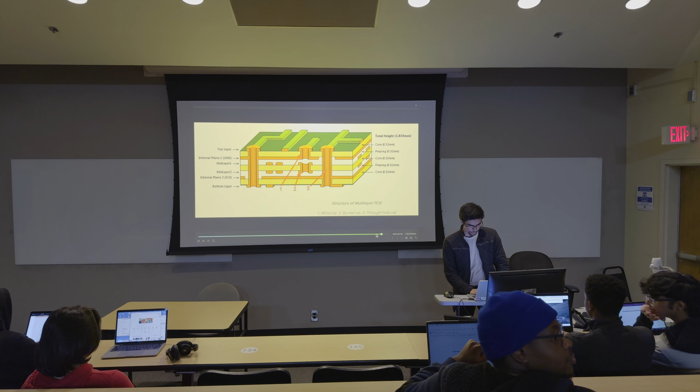So this is gonna be our avionics bay.

Right now, I'll show you my screen in Fusion 360. So this is the current model of our level 1 high power rocket. I can dissect this, do a sectional analysis,

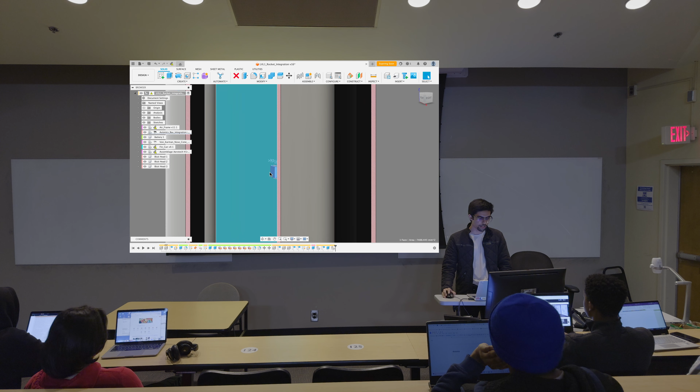to see inside. So right now, as you can see, this is the PCB. There's just one single chip right now. It's an accelerometer. We want so many things to be done by our avionics bay, like our flight computer, but

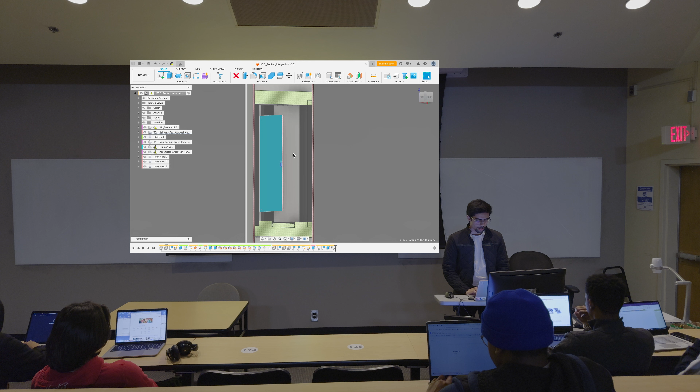just one chip cannot do everything. So we're gonna have chips for each task that we want. We have to think about it, and we have to make a design of this computer.

So let's begin today's meeting. I'm gonna teach you about signals, about how you work on those signals, how you make your own

computer from a bare chip, like an STM32 or an Atmega 328P. So let's begin.

In the winter break, I gave 8 lectures on rocket science and all these things, but there were not as many people as there are now. So I'm gonna walk you through those slides.

So there's something called schematics, or let's just start with the signals first. Okay, I'm gonna turn the lights on.

Does anyone have any idea of what signals are? How would you define a signal?

Like something that's sent out. Maybe I don't know what the thing is, but just something that's sent out. Pulse. Pulse? Pulse is a signal.

Pulse is an example of a signal. But what is a signal? Yeah, that is also an example of a signal.

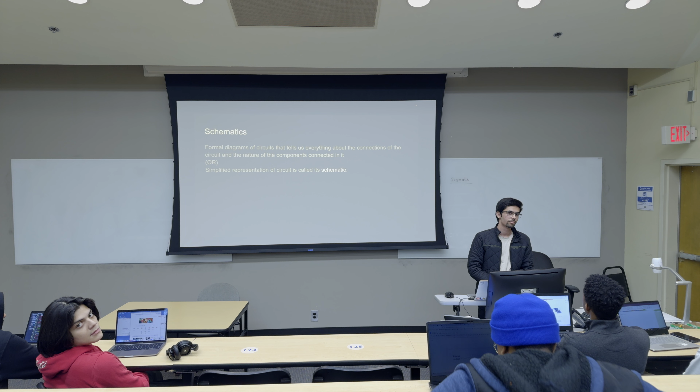I would say it's like a low-level thing, like communication from one part to the other. Whenever I learned about signals, it was in operating systems. It'd usually be about some hardware stuff. I don't know.

Yeah, you're close. It is actually a low-level thing that is used for communication. So, a signal is something that can transfer data from one place to another. If you wanna transmit your data from position A to position B, then you have to generate

a signal from that A location, such that the signal is gonna travel, and whatever signal you're using, there's something called a carrier that carries your signal. So right now I'm speaking, right?

So how is the information going from me to all of you guys? So when I'm speaking, my vocal cords are vibrating the air molecules.

They are generating pressure waves, high pressure regions and low pressure regions in air that are traveling in the air.

Air is a medium, air is the carrier of this signal, and then that's reaching your ears, and you're listening to it, and your eardrum is again vibrating according to those

pressure waves, and then that's encoded in your brain, and you understand that. So we want something like this for anything or everything that we wanna implement in our flight computer.

Let's say we wanna know our location, the location of our rocket. So we wanna generate such a signal

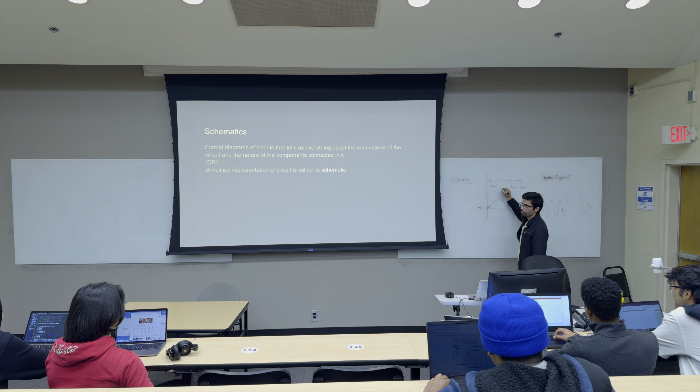So we can encode our information in a signal looking like this, as well as in a signal looking like this. So in computer science, we call this one or true

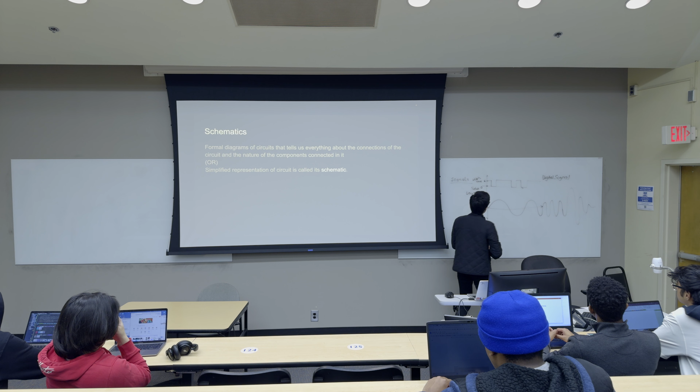or high, and we call this state zero or false or low. This is a digital signal, and this is called an analog signal.

I'll give you an example.

Do you guys know what a resistor is, or what a voltage is? When I say 1 volt, what does that mean? Is there anyone who does not know? Because I can give you a quick walkthrough of electronics.

So there are a couple of devices in electronics. One of the most commonly used devices is a resistor. This is the schematic symbol of the resistor, this is how we represent it on a diagram. And there is something called an inductor, this is how we represent an inductor. And there is something called a capacitor. A capacitor looks like this. They have different functionalities.

So when we generate some current, what is a current? Let's say this is a loop of conducting wire, a loop of copper. So when I say that there is some current inside it, what does that mean? Electrons are flowing, right? So there are charges flowing in this wire.

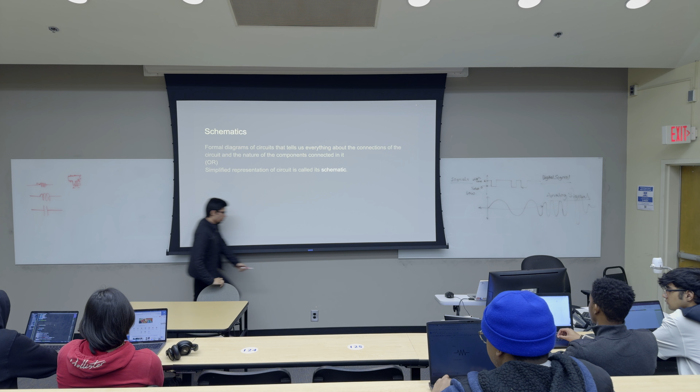So the current, I can draw that with the green pen or the purple one. We represent current by I. So current is flowing clockwise, and the electrons are flowing counterclockwise in the circuit. This is just a weird convention that we say current is movement of positive charges, but there are no positive charges that are moving. There are electrons that are moving, so we say that they're opposite.

So this is a resistor, we represent this by R. This is an inductor, I or L, inductance. And this is a capacitor, we say that its capacity or capacitance is C.

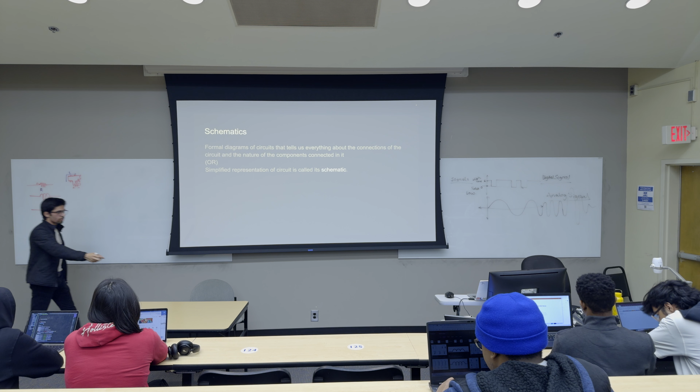Now we can make some circuits and play with these signals using these circuits. Let's say you connected, you are using this plug here. So there is some signal coming in that plug that is powering your laptop. That signal is going to look something like this. On the y-axis it is voltage, and on the x-axis it is time. So as time goes on, your voltage is going back and forth between some positive and some negative value. This is the signal that is coming from the power plug on the wall.

You cannot use this directly to power your computer, so something is happening inside it where you're playing with this signal. The signal is getting modified, and then it is powering your devices. So what's happening is there's something called a rectifier that is rectifying this signal. What does that mean? It means all of the negative parts of this graph are flipped along the x-axis and mirrored, so every wave is totally positive.

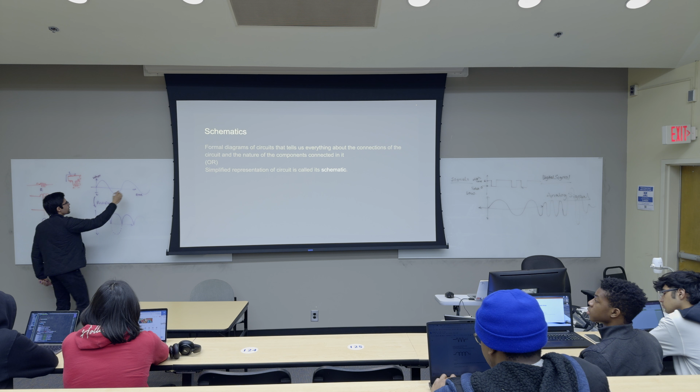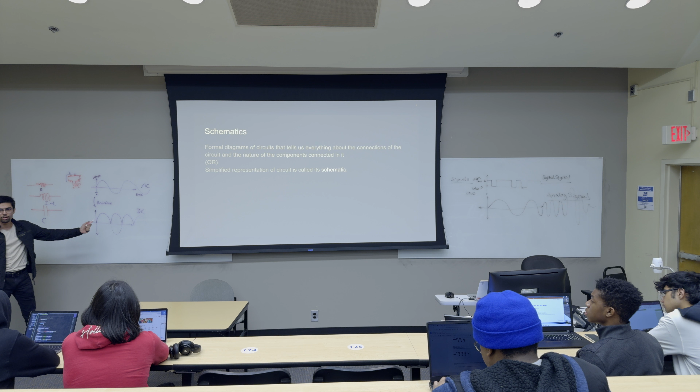This is called AC current, that is alternating between positive and negative. This is called DC current, whose voltage is always positive, never negative. Now, even if you use this, the voltage is going to harm your devices because this is changing violently. So what can you do about this?

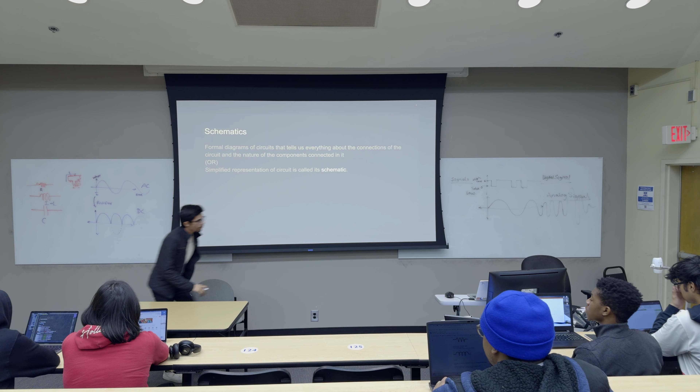So what we do is, let's say this is the wall output, and let's say this is plus and this is negative, and then you attach your device with this. You want to attach your device, then you need to charge it, it could be your laptop or something. So you will not attach it directly, you will add a rectifier first. I'm representing the rectifier like this right now.

Now the signal here is like this, but even this signal is going to harm your computer. So you have to put some other devices in between so that a clean signal looking like this goes into your systems, in your laptop for example. So what is that other device you can add? One is a capacitor, you can add a capacitor here and connect this to the ground, to the negative again. What this is going to do is...

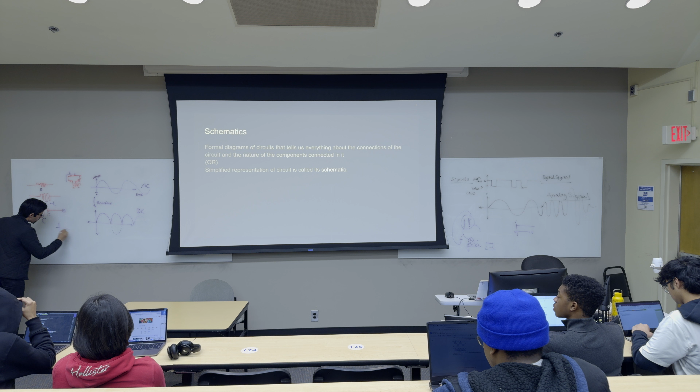So I'll tell you first what a capacitor is. If you apply some voltage difference across a capacitor, it is going to create some charge on that capacitor. This plate is going to have positive charges, and this plate is going to have negative charges. And the current cannot flow through a capacitor, a DC current looking like this cannot flow through a capacitor because they are literally spatially separated. So how is the current going to flow? It doesn't flow through air. So this basically stores charge, so we use capacitors to store charges.

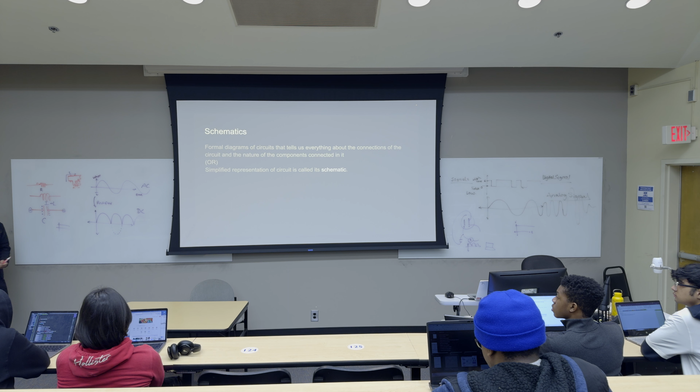And this comes handy in situations like these.

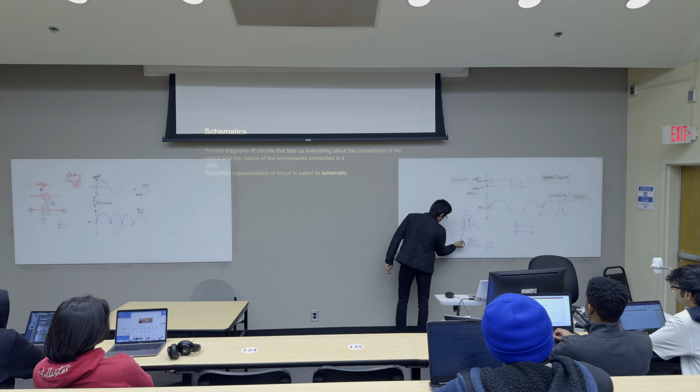So what this is going to do is it's going to store positive charges on this plate and negative charges on this plate.

So right now the signal in this wire looks like this, but as soon as we add this capacitor, I'll draw here. The voltage is increasing first, the capacitor gets charged. Now as soon as the voltage starts to drop, we want it to drop like this, but because there's a capacitor in the circuit, it has some charge stored inside it. As soon as the voltage begins to drop, this capacitor will start dumping its stored charge back into the circuit again. It's gonna look like this.

Then the voltage will again increase, and as soon as the capacitor is charged again, it's going to dump its charge again. So you smoothen the noise out like that. The capacitor is dumping charge when it's required in the circuit.

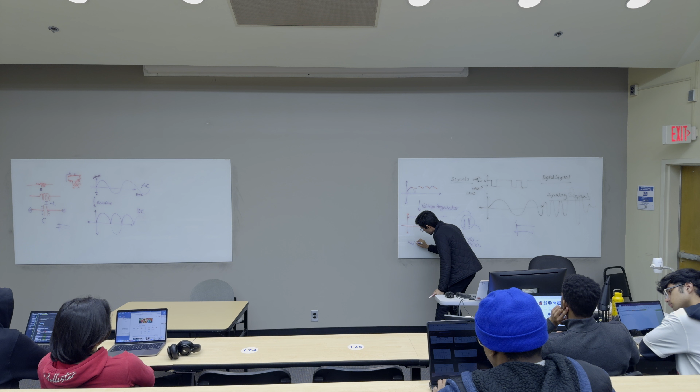It's gonna look something like this. So this is very close to what we want in our systems. Now if you zoom into it, if you scale the x-axis, if you zoom in the y-axis, you're gonna see that it is very bumpy on micro scales. So you can even remove this noise. This noise has some high frequencies inside it.

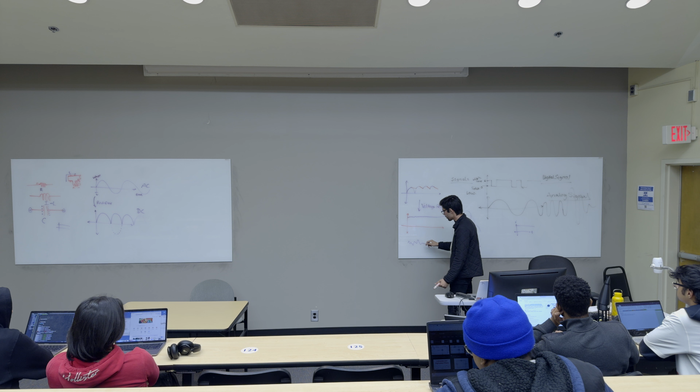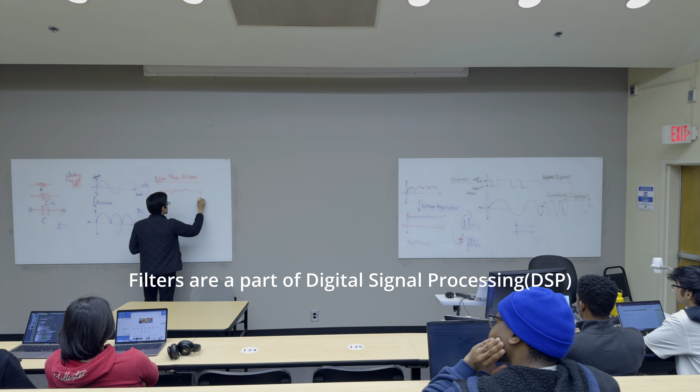So if you apply a low pass filter, what it does is it can take in a signal like this, and it's going to cut all of the frequencies that are pretty high. It only allows low frequencies to pass through. So after filtering it through the low pass filter, it's going to look something like this.

Now the higher frequencies are cut off. There are only very low frequency variations in the voltage now. So this is what we can use to power our computers. This is all the circuitry that goes inside your laptops to power it up.

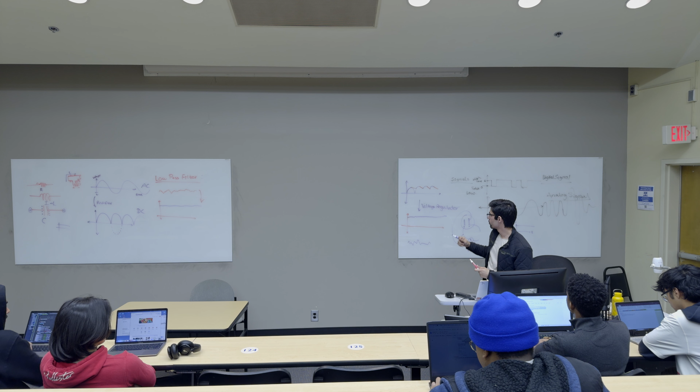Now, when we make our flight computer, we are not using a power wall like this, so we're not dealing with this kind of signal, but something more like this. So let's begin making our computer.

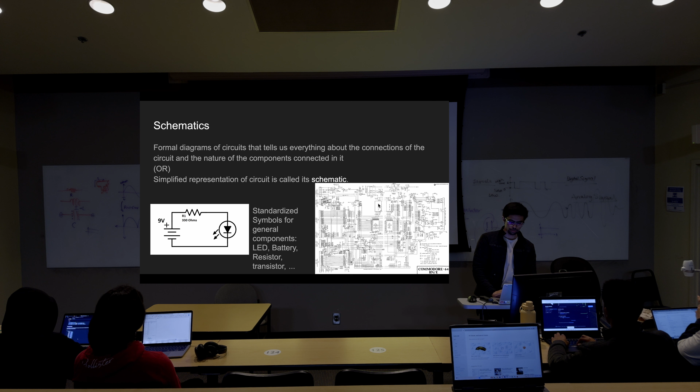The way we design things in electronics is there's something called a schematic. I can show you slides. This is how you draw circuit diagrams. And if you extend this idea all the way, circuit diagrams could be pretty complicated. We call these schematics.

These are transistors. You can make logic gates using these transistors, different logic gates: XOR gate, OR gate, NOR, NAND. And...

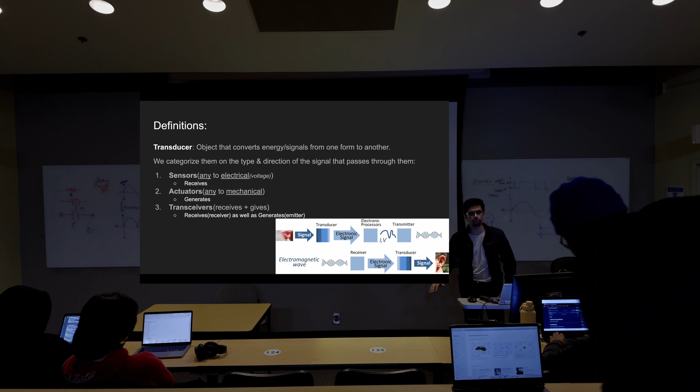These are a couple of definitions: transducers, sensors, actuators. So I told you what a sensor is. A sensor senses the physical environment and encodes that into a signal so that it could be interpreted or transmitted later. A receiver or transceiver is basically the thing that receives or generates those signals to propagate them through any medium. Actuators, on the other hand, say for example you are controlling a robot, we call actuators things like motors, or hydraulic pumps or something, that can make a physical thing move or create some motion in real life, in physical life.

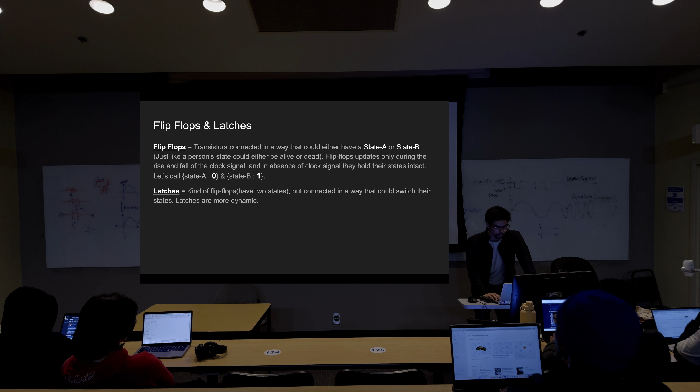I'm not going to go through these slides. These are my winter break lecture slides. If someone's interested, I can share the link. These are a couple of sensors.

So this is the chip, the computer that we're talking about all the time. We're gonna use this to make our flight computers. We can connect a bunch of sensors to this, and the way we connect a sensor to a chip is called communication protocols. So the industry has standardized some protocols that they're gonna use to communicate back and forth,

so that the manufacturer of the chip knows how to design these pins, and the same protocols are gonna be used by the company or the manufacturer that's going to manufacture the sensors, so that they're compatible to each other. So if we also understand those communication protocols, then we can implement them and make whatever we want.

In Fusion 360, now let's import some of the libraries here. So if you go here, place components. Do we create a design? Create an electronics design. Then there should be a new schematic button. Okay, got it? A new schematic then? Yeah, new schematic. On top left, there should be some here. Oh yeah, I see. Click on that, you will come to this window. Now click on this place components.

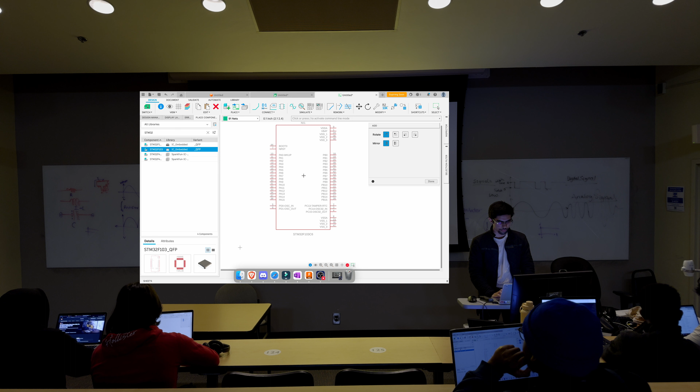Yeah, I only have two. You have two? Because I have this additional library. Let's just go with this one, the second one. Double click on it, and then you should be able to place this in your schematic area. Just single click on it, and it is now placed. It's gonna stick to your cursor still, and you can place multiple copies of it. But if you hit escape key, then it's gonna go from your cursor.

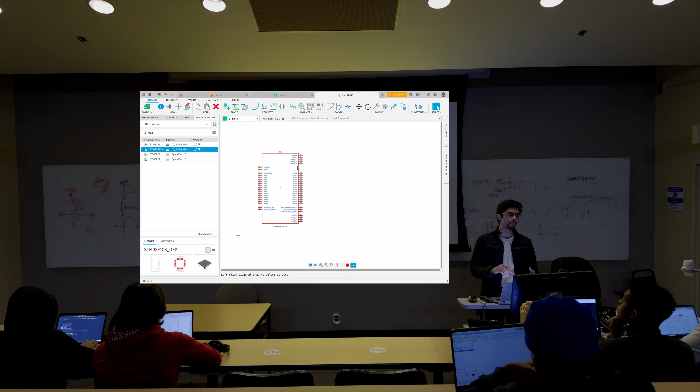Now, this is the chip. This is the simplistic version of the chip that we just saw. So in schematic, there's a simplistic diagram of the original thing. It's called the symbol of that component. Now let's add some resistors. Search for a resistor, and you're gonna see this. There's a drop down next to the resistor. So if you click on that, you will be able to see different types of resistors.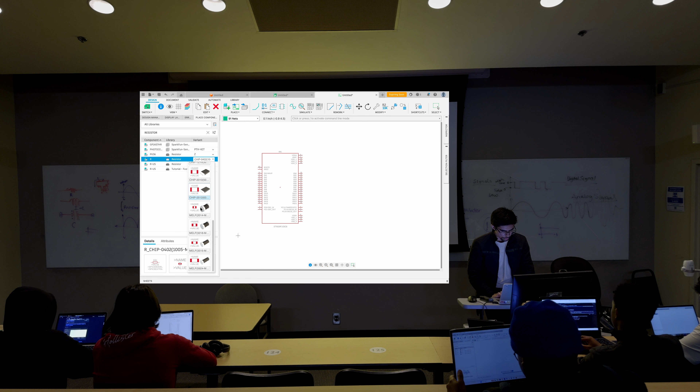So which one to use now? Now in PCB designing, there are two types of components. We classify them into different types.

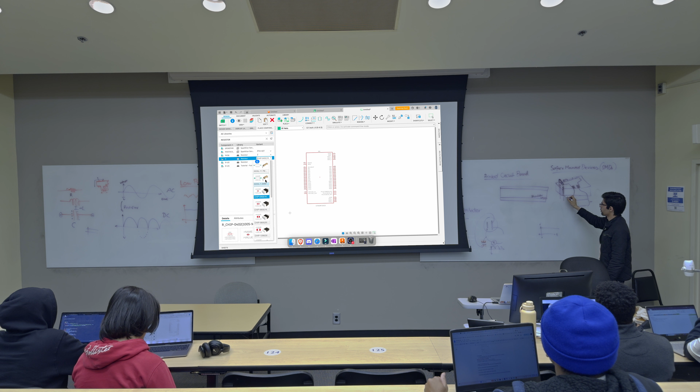They're pretty small, they're pretty compact, and you mount them on the PCB. They do not pierce through the PCB. But there are other types. The other type was right here in the Fusion360 drop-down list. This type of resistor is gonna pierce through. You have to have a hole in your PCB all the way. The resistor that's on the screen right now is going to pierce through these holes, and then you solder these legs from the other side.

So type 1, we can call it clunky or something. It doesn't have any name. And then we can call this surface mounted devices, SMD. So right now let's pick a non-clunky SMD version of this resistor. Double click on this. Then you should be able to place this in your schematic. Let's place a bunch of them. Done.

Doesn't matter which one we pick as long as it's not the one we have to solder, the one that goes through. It doesn't really matter, but in flight computers it does. Oh, okay. So this is just like practice. Yeah, we're just taking a walkthrough of the software.

Now let's add an LED. Let's go with this one, LED chip. We can go with any of these, because here you can see the 3D package. There's a 3D model attached showing how that LED looks in real life. You can see that here. Let's pick a red one. Double click on it, and then you should be able to place this in your schematic.

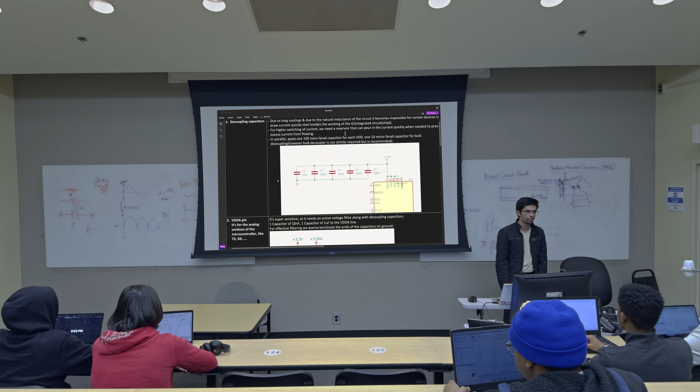Once everyone has done this, let me know and then we'll move forward. Should we move? Okay, let's go.

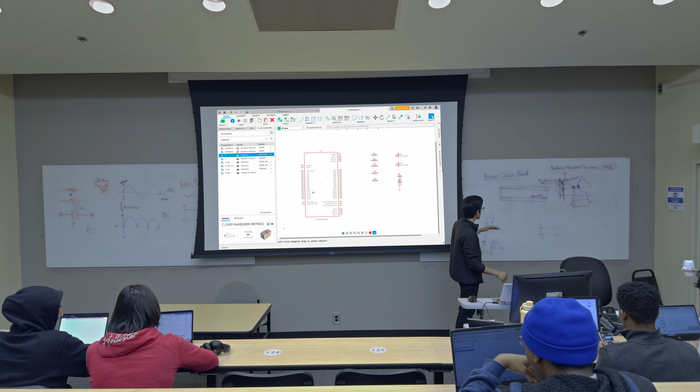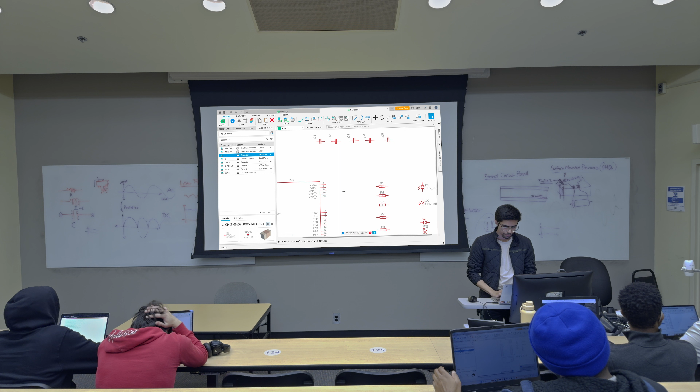Now, to power this up, you again need a pretty steady voltage. You can use a battery, but the battery is gonna produce a noisy signal, just like it was here. So to deal with that noisy signal, we are gonna use these capacitors. There are many pins in this microcontroller. These VSS pins are for the negative or ground terminal, and the VDD pins on the top are for the positive terminal. From the libraries, let's also place another component, VCC.

If you search for VCC, you will find this. Double click on it and then place it in your circuit. Hit OK. And also add GND, that is the ground terminal. Should be right here, something like this. Double click on it and then place it in your schematic. Hit OK. Escape. So this is your positive terminal and this is your negative terminal.

Now you can connect your positive terminal directly, but that's gonna cook your STM32 microcontroller. So what we're gonna do is first add some capacitance. Just follow me. What I'm doing right now is all gonna make sense in a while. So draw this connector like this. Bring it here, and then also connect these pins to the same.

Then you can click on the select tool, select your GND, and move it all the way down because the negative pins, or the ground pins, are here. We are also going to connect this. Now you've kind of powered your STM32, but the power signal is not clean yet. We're going to fix that.

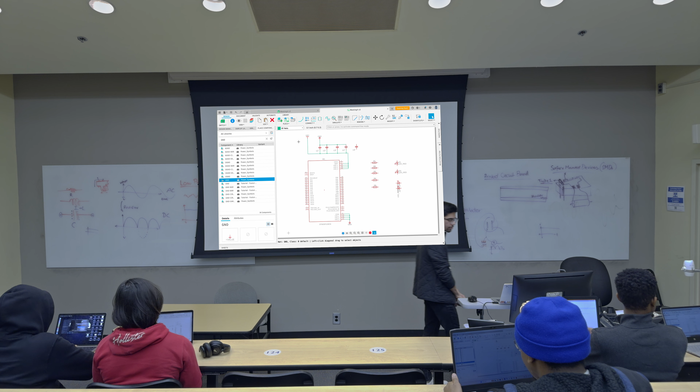So do we need another ground? Do you have like 2 grounds? Oh, okay. You can put multiple grounds. It's the same thing though. Oh, okay. Yeah. Are you all done?

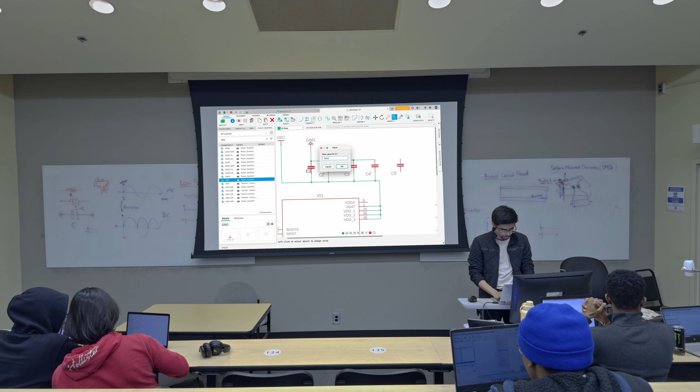Now we're gonna add capacitance values to all of these capacitors. If you right click on this, you will be able to see value here. You can say 100 nanofarad, or wait, give me a second. Attribute.

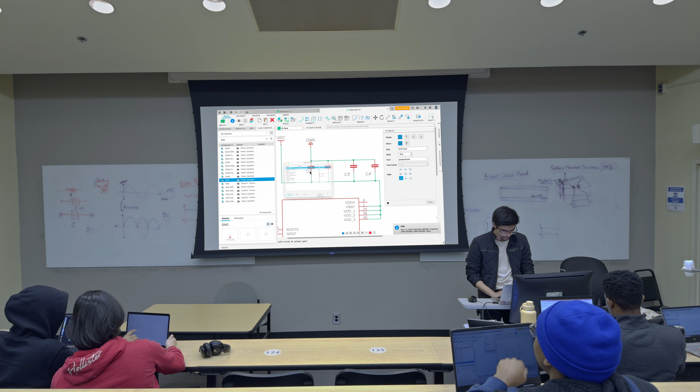So you use like U? Hmm? You use the letter U? Yeah, I use the Eagle PCB instead of Fusion360 Electronics, so it's kind of new for me. Oh. But that's almost the same, but a couple of things are different.

You should be able to click here, Design Manager tab. All your components that are in your schematic are here, and then you can change the capacitance values. Yeah, it's right here. Okay, the values are right here. So you can add, let's say, 100 microfarad, and then in C2 you can add 100 microfarads.

So we're gonna add nanofarads, a 100 nanofarad capacitor for each of these pins. My bad. NF. Farad is just the unit of capacitance. Hundred nano, NF. 100 NF. Now all of these capacitors are of the value 100 nanofarads.

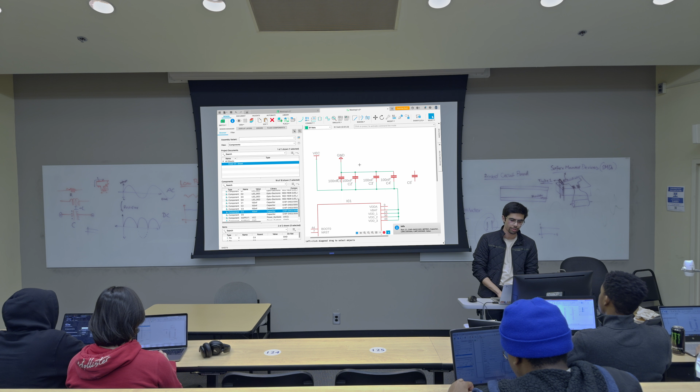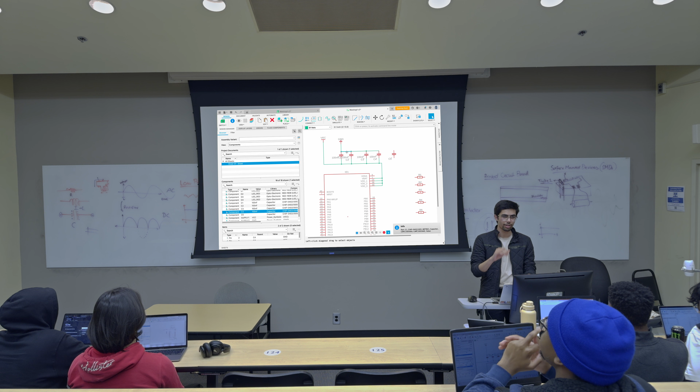And how did I know that it should be 100 nanofarads? I just went to the documentation of STM32. The manufacturers who made this chip have documented everything: what these values should be, how your power and boot loading schematic should be, how you should connect the memory to this STM32, how you are supposed to connect the different sensors with it.

So these pins do not have much information about what they do. A pin of a microcontroller can do a couple of things. A pin of a microcontroller can do two things mainly. It could either read the voltage, or it could write the voltage.

So what do I mean by that? Let's say you connected this pin to a device in the physical world. Let's say you connect this to a sensor that senses pressure, for example. If you apply more pressure onto it, the voltage that the sensor generates is gonna increase. Let's say I put a 100 kg rock on this sensor. The value initially was 0, but as soon as I put the weight, it is some higher voltage than 0. Let's say it is 5 volts.

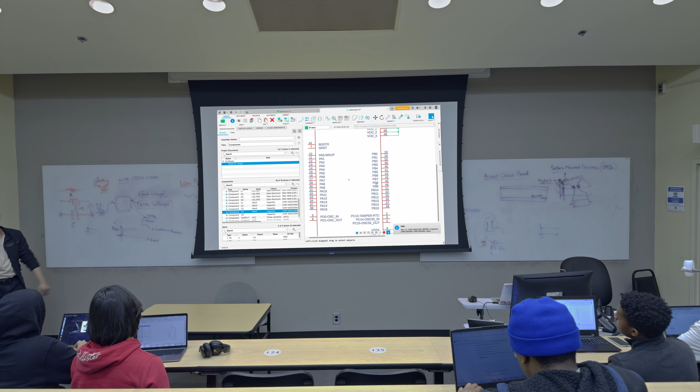Each of these pins could be implemented in different ways. We can do simple things like these, but if you have a complicated sensor, it's not that simple anymore. There are communication protocols that we have to follow, and using those we connect our pins to the sensor.

If you look at an accelerometer, there are 3 or 4 main pins. You have to power your sensor, so for powering there are 2 pins, and to communicate back and forth between the STM32 microcontroller and your sensor, there are 2 other pins. One pin is for the clock signal, and the other pin is for data transfer.

Every single chip has some heartbeat inside of it, that's the clock signal, and it synchronizes their processes internally. If the clock of the STM32 is not synced with the clock of the sensor, they cannot communicate, because it's going to send and take data randomly. It's not going to be a communication. So to synchronize both of them, there's a clock CLK pin in both.

You're going to look up the documentation of the STM32 to see which pin is CLK, clock compatible. Let's say you figure out it's pin 11, then you connect this pin of your sensor to pin 11 of the STM32. For data transfer, after they are both synced, you can use any of the pins.

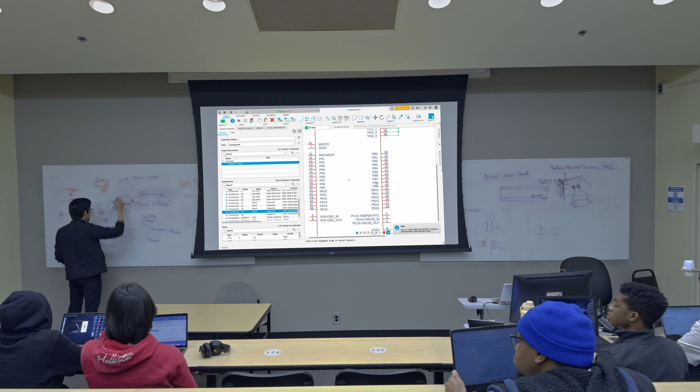In your program, when you code this, you have to write 'initiate serial peripheral interface', initiate SPI, and then tell your program that pin 11 is the clock pin and pin 10 is for data transfer. We're gonna look into the code and do hands-on work in the next session. This is just to let you know how communication protocol works.

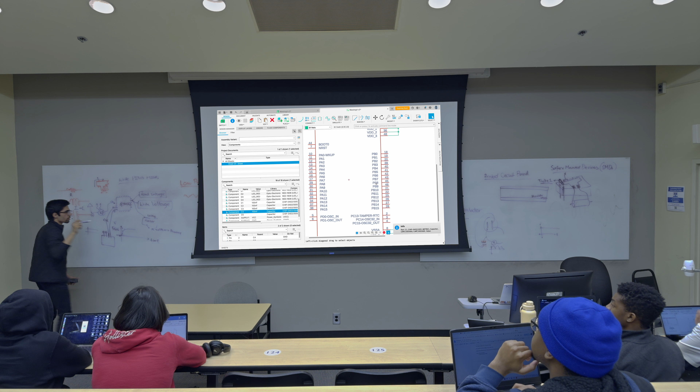In every single synchronous communication protocol, there's a clock line that syncs the clocks, and then there's a data transfer line. Different communication protocols implement things internally differently, but the idea is this.

This is enough to power your STM32. Now that we have powered it up, we would want to light up an LED.

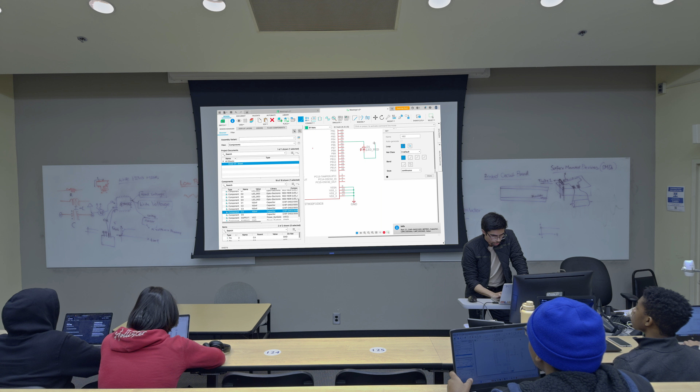To light up an LED, bring this LED here, connect this pin, let's say pin number 41, to this end of the LED, and connect this end of the LED to the ground. Let's copy the ground and place it here, then connect it all the way.

If we apply 5 volts to an LED, your LED is gonna blow up because an LED does not have any resistance inside of it, and if your circuit does not have enough resistance, a lot of current is gonna pass through the LED and it's gonna get cooked. So what you do is add resistance in the circuit.

Let's add a resistor here before connecting it to ground. You can use this delete tool to remove your connections, then click here, bring your resistor here, and rotate this.

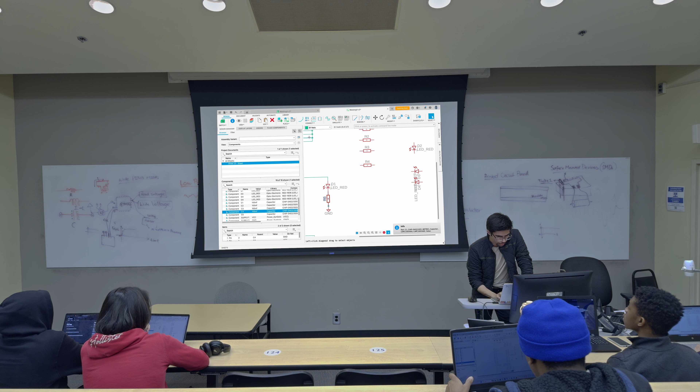Sorry, how do you rotate it again while you're moving it? Do you right click as it's still, or? I did it but like this. Click on the rotate tool — oh, and then click on the component that you want to rotate.

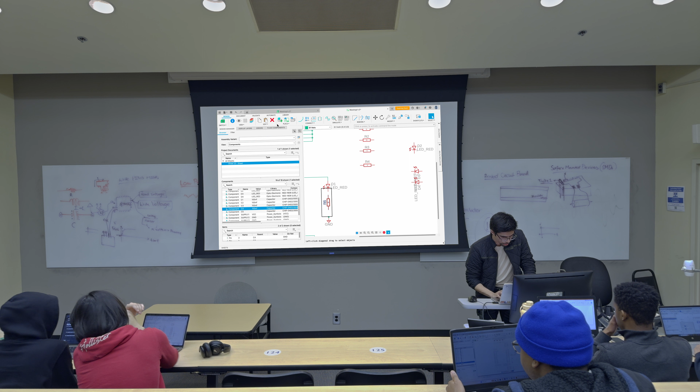We need some more space to bring the resistor here. I'm gonna drag it down, bring it here, rotate this, and now connect these — this to here and this to here. So we have implemented an LED circuit here.

Let's delete all of the rest of the components for now because the time is almost up — it's actually up. I'm gonna delete all of these components for now and save the circuit. There's one more thing that I want to show you before you leave.

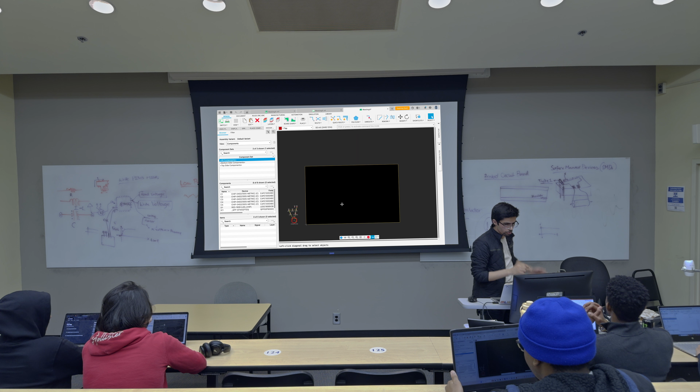There's this button called 'switch to PCB document'. If you click on this, you'll be able to see the actual components. Now you have to place them on this PCB, and trace the copper paths I was talking about to make these connections. Let me demonstrate that real quick.

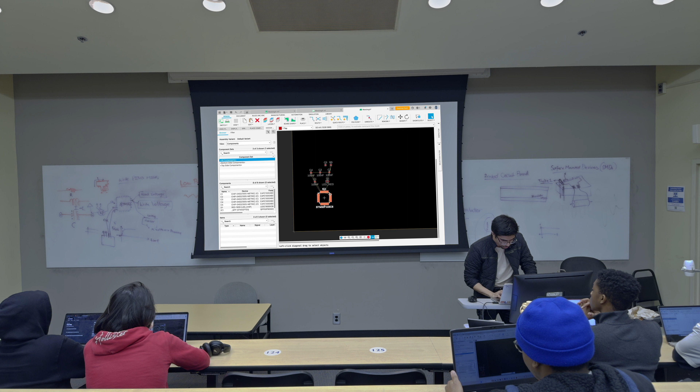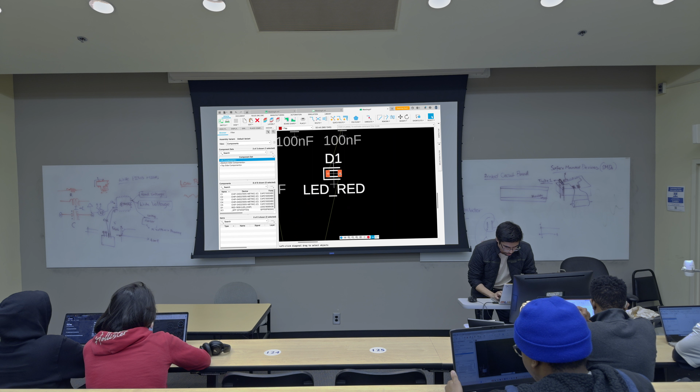I'm gonna move this group onto the PCB, make some space for that, and rotate this a little bit. Now you see internally whatever we did in the schematic is implemented here to help us know where the copper path should go. For example, this pin of the STM32 should be connected to this side of the LED. These lines help us know where we have to draw the connection.

Then use this tool, route manual, and click on this pad here. You should be able to see that you are drawing — these are the copper paths, and you connect them like this.

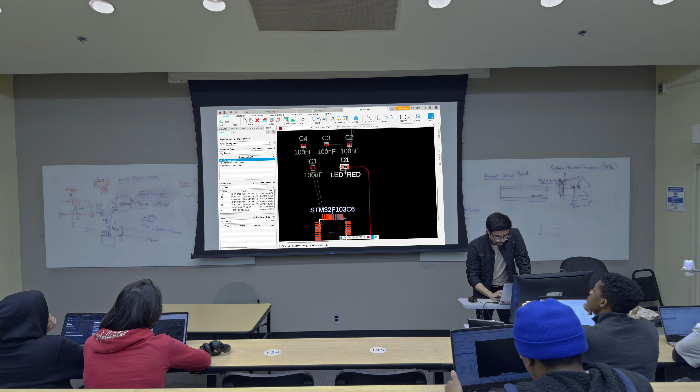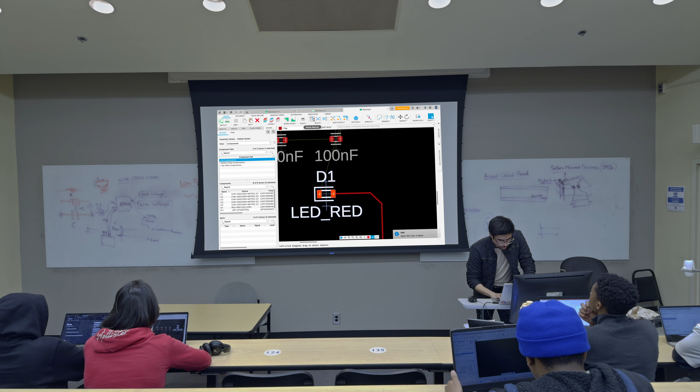Then you have to draw this — you have to connect this part of the LED to this resistor, which is R5, the 5th resistor in our circuit. Basically it shows you where you have to draw the connections, and you just draw them.

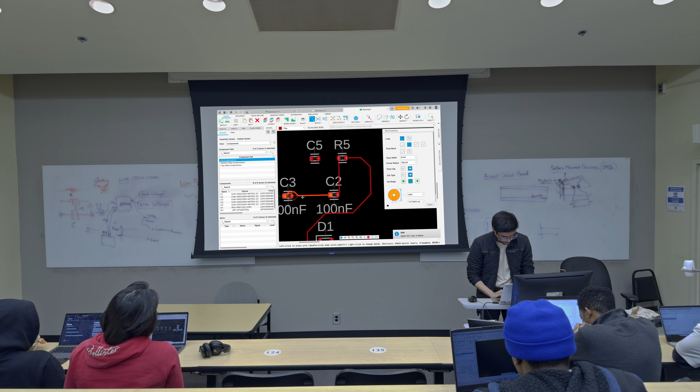I'm gonna rotate this capacitor again.

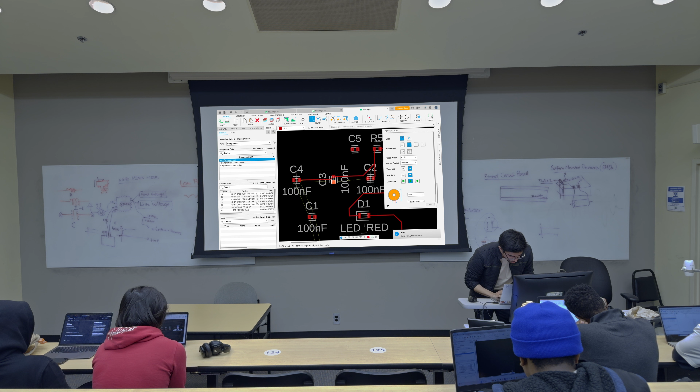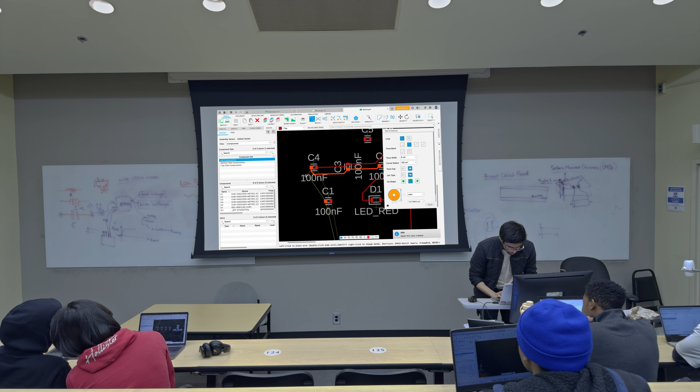And then I'm gonna connect this line to here, this line to here. This line is gonna go all the way up there. This line will also connect here, and this line is gonna connect to here. This terminal will go here.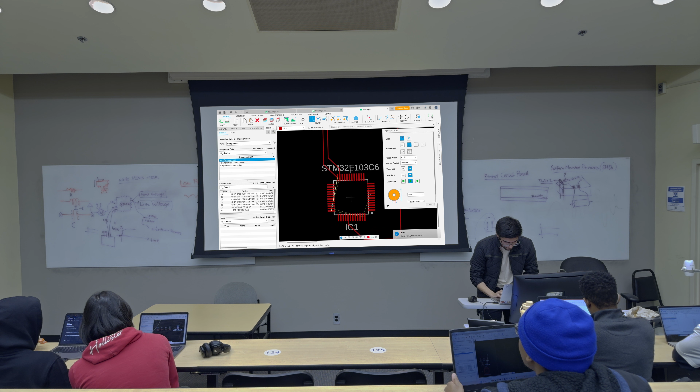Once you are done with the connections, you can actually send this to a manufacturer and they're gonna print it for you. And then you can solder these components, these small SMDs, on top of that using a soldering paste and a soldering iron.

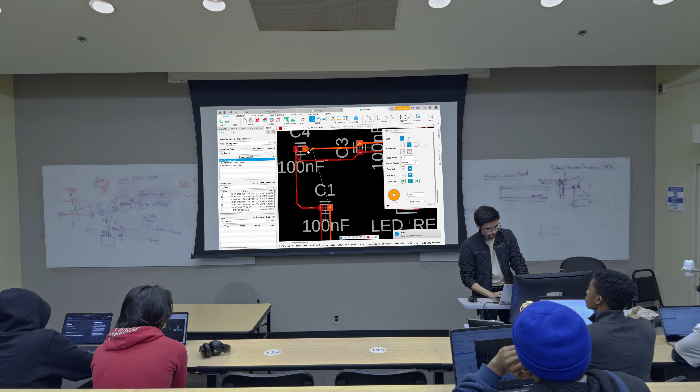So here's an interesting problem. I want to connect this terminal to this, but if I do that, I'm gonna change the circuit. I'm gonna short these two paths. As you can see, the software does not want to cross these two paths, because if you connected these two, you screwed up the circuit. So how can I route this? This is the last thing I want to teach you today.

You can start routing it here, and then there's a tool called Via. Let me see where this is... Via here, and basically what this does is—let me see if I can find a photo, images.

Okay, perfect. So you see, this was one of the copper paths that we were drawing, but we don't want to cross two of them, but we still have to do the routing. So what we can do is we can have multiple floored PCB, and then we can drill a hole.

I'll show you. Let's say this is one of our lines on the board. We are drawing another line that's coming like this. So we can go down. We can make a hole here. We can go down through the hole, and then as you see here, this is one of the copper paths, and this is the other copper path. If there's a hole and you route like this...

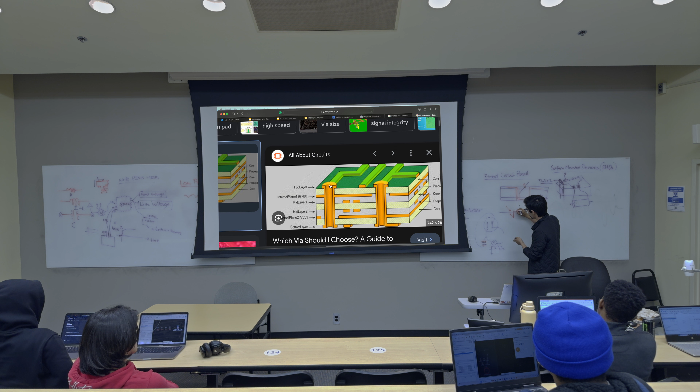You can cross without ever touching the line on the top floor. So you can route underneath that. So you come on this side, you can create another hole, and then you can still connect your component without ever touching that line. So this is called Via. And modern PCBs are at least four-layered PCBs like this one, and the Arduino board that we buy is also 4-layered.

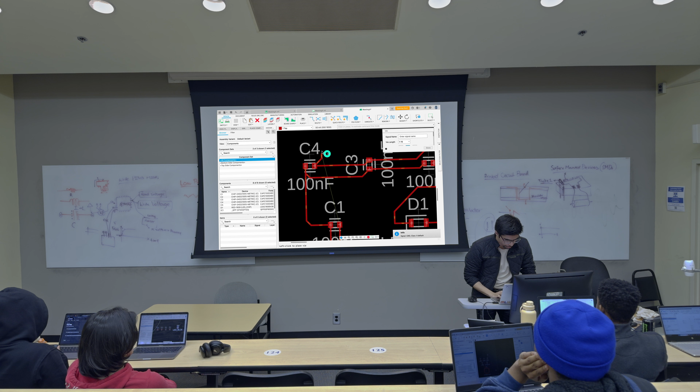So I'm gonna put this hole right here. Just to show you once again, I wanted to connect this terminal of capacitor 4 to this terminal of capacitor 1. So I'm gonna start routing. I'm gonna drill a hole here using the Via tool. Then I'm gonna change my layer.

So you can go in the bottom layer. Flip board. So now I'm at the back of the board, so I can keep drawing here. Then I can drill another hole. Oops. Okay, where's the drawing layer? Oh yeah, it's here, on the bottom. Two, drill a hole here.

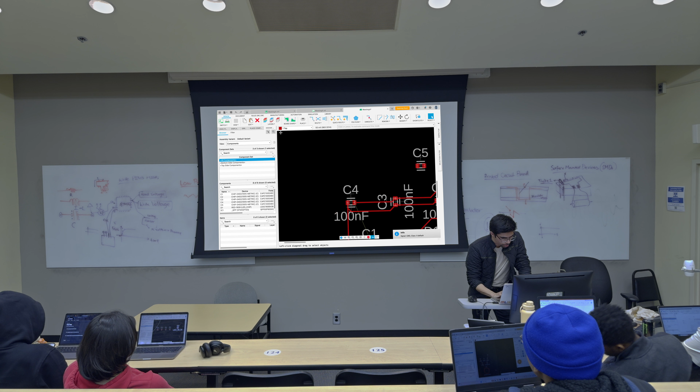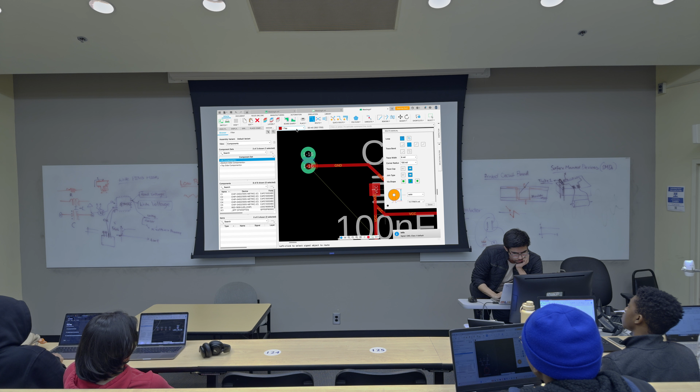I shouldn't flip the board. Okay, let me try again. It's not allowing me to connect it. That's weird, I can select the bottom layer. So this is now being drawn in the layer below the upper one.

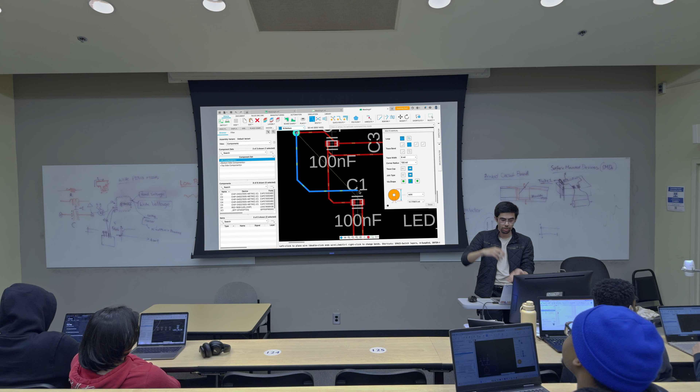So I can cross it without ever touching them, as you can see. The blue layer is the bottom layer, and the red layer is the top layer. But because this capacitor is placed on top of the PCB, we still have to pierce through once again. We're gonna make a via hole here.

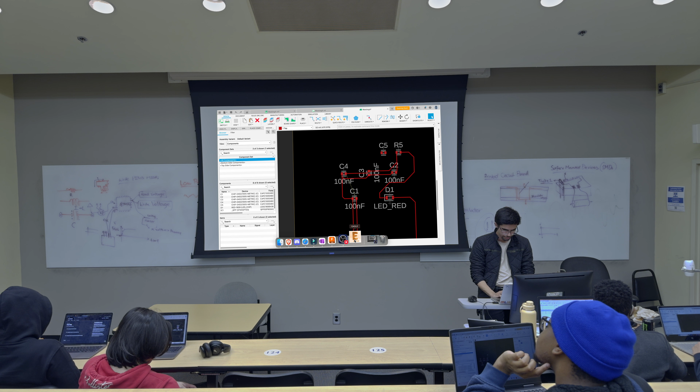This software is kind of weird, not allowing me to do that, but you get the idea though. You just have to connect this without crossing that, so you go in another layer to connect it. This is how you design computers—this is how your MacBook or your Windows computer is designed in real life. So we're gonna make our own computer just like this, implementing some of the communication protocols and logics like these.

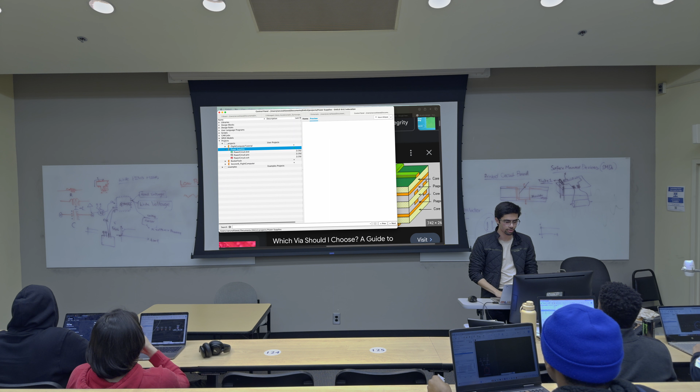And that's gonna fly and control our own rocket. I hope you guys liked the session, and if you have any questions, you can remain seated and let me know. Otherwise, you're good to go.

Which channel is it on? This one.